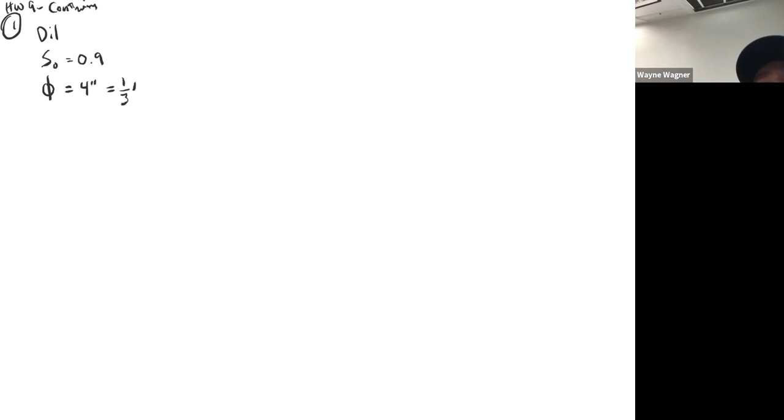And then it's got a mean velocity in that pipe. Velocity is usually written as U, and the overbar means mean. So the mean velocity is 8 feet per second. This U just means velocity in the X direction.

So that's what's given. And then required, we want to know what is the volumetric flow rate - that's Q - and we want that in CFS and GPM, gallons per minute. Then the mass flow rate, written as m dot, they want that in slugs per second. I'm going to assume that you, like everybody, aren't happy when slugs show up. That's pretty normal. However, just think of it as no different than kilograms - like if I had kilograms per second, we're just using a different system.

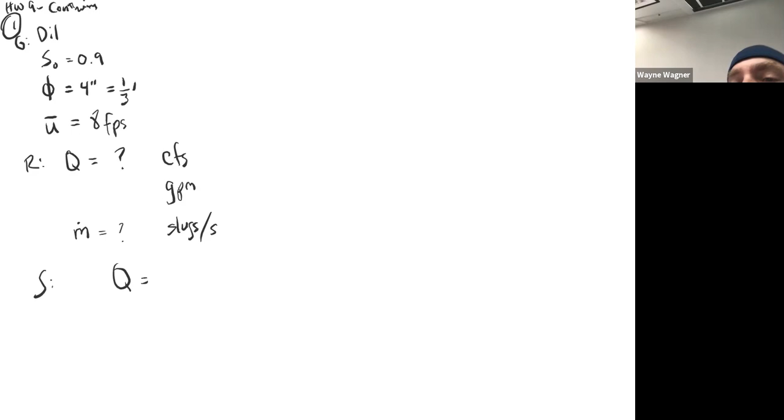So the way we do this is we have to think about Q. Q equals, technically, the integral of the velocity - which in this case will be U - times dA, integrated over the area. That's technically how we'd define it, really it's even a dot product. In this case, however, they don't tell us anything about this thing varying over an area - they just gave it to us as an average velocity.

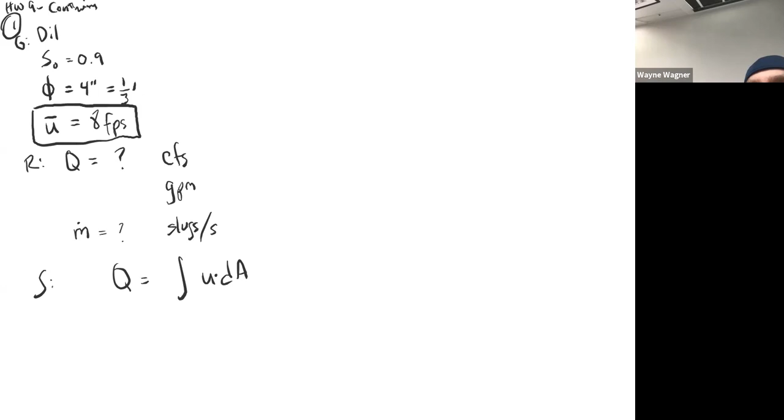So if you have an average velocity, you can change this and say, I don't want to deal with that integral - we're just going to make it the average velocity times the area, which is a lot nicer. If you get that, you should be very happy, and that's actually most of the time what we'll do here. On tests, sometimes I like to give you something with an integral just to make sure you know how to do it, but that's a once-in-a-while thing. Most of the time we deal with average velocities.

So once we get that, this is really not too involved. We've got a U right here, a U bar, that's 8 feet per second, and we've got an area. Now my area I went ahead and converted to feet because that's just the easiest thing to do.

So the formula for area that we use in this class almost always is pi times diameter squared over 4. You're used to pi r squared, but most of the problems here give you diameter, so it's easier to just get in the habit of using this.

So pi times the diameter, in this case a third of a foot, we'll put the foot in there, squared, and we'll divide by 4. That's how we get an answer, noting that we've got feet squared times feet, so we've got feet cubed over seconds.

So if we multiply that all out, I'll do the calculator here, although I don't think you need to see me punch this in, but we'll go ahead and do it. 8 times pi divided by 4, times 1 divided by 9. So that's 0.69813, and that's cubic feet per second.

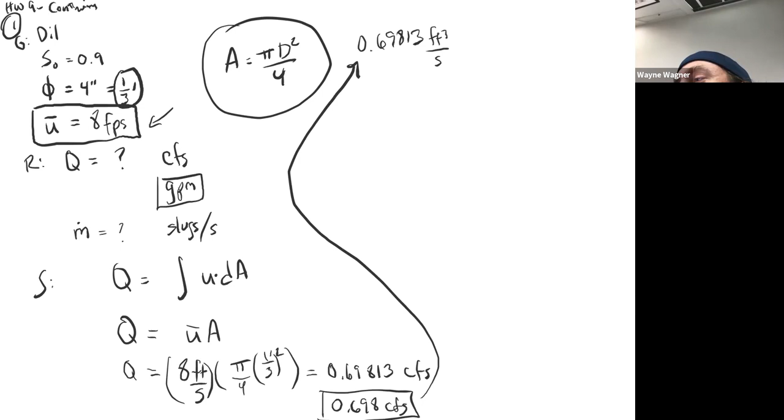Now if I were to do this to you on a test, you would just look up the conversion rate from cubic feet to gallons. You don't have any idea what it is? I have no idea, can you imagine? Can you guess? Like, think of a gallon of milk and then think of a cubic foot. How many gallons in a cubic foot, you think? I couldn't even guess, maybe 2. That's probably what I would have guessed too. It's actually surprising to me.

So 1 cubic foot actually has 7.48 gallons in it. To me, it's pretty surprising. So from that knowledge, you could actually pretty easily figure out how much, because you know the weight, it's 62.4 pounds per cubic foot. So you could very easily calculate how much a gallon of milk weighs, or a gallon of water, a gallon of anything that's mostly water.

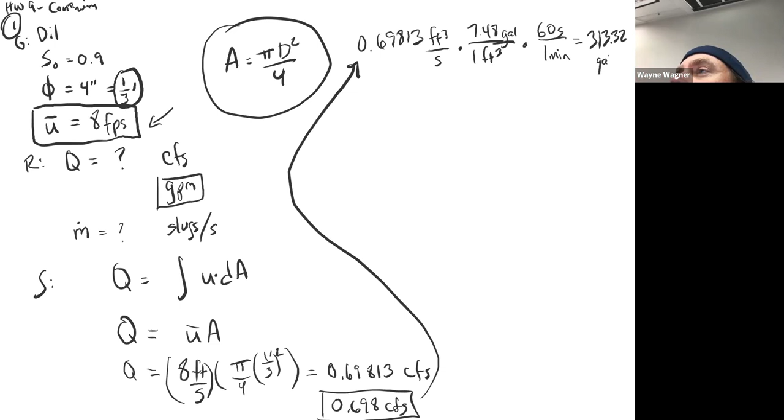So that will get a gallon, and then to get this into minutes we would do like this, so now we'll get gallons per minute. So we'll take that number, multiply times 60 times 7.48, and we get 313.32 gallons per minute, or 313 GPM.

And this is really a nasty unit, so we don't really ever want to do that if we can avoid it, so that's no good. Actually, let me bring up Zoom here. Maybe I can, oh yeah, I like having Zoom on 2 screens so I can see what it looks like. All right, so let's see.

All right, so the last thing is m dot. So anytime you want the mass flow rate, m dot equals rho times Q. And if you can't see that, just think about it as, all right, this is how many cubic feet... feet cubed. Where's my eraser?

Just to give you a little intuition here, this is how many feet cubed we're getting every second. And we're like, well okay, but I want to know how many slugs per second. Well then for every cubic foot coming in, how many slugs do we get? Right, so if I'm getting 20 slugs for every cubic foot coming in, and I've got 5 cubic feet per second, well I just multiply 20 times 5, and then I've got 100. Does that make sense? Yeah.

Okay, so this should be fairly logical, and of course stoichiometrically it works out because we get slugs per second. So then we need to do rho. So the rho for this oil, well that's SO times the rho of water, right? And then this is Q.

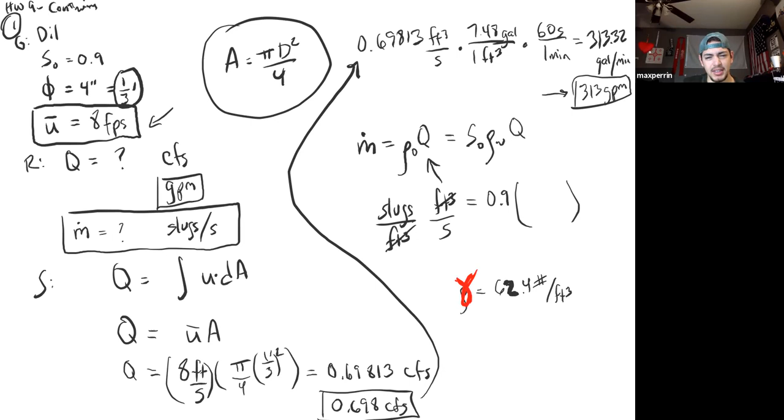Oh no, we want slugs, right? This is gamma. Okay, this is like the most missed thing on anything. So how do we go from gamma to rho? We multiply by specific gravity, or we multiply rho by specific... wait, okay, what's gamma equal? Rho over the rho of water. No, this is specific weight. Oh, so what is gamma? So gamma is rho times g.

So if I want rho, what do I do? Divide by gravity. So what's gravity in this system? 32.2. Okay, so this is what you need to do if you can't remember. So if you divide by 32.2, you're going to get...

Usually we just use 3 significant digits, but rho equals, if we divide by gravity... I like my equations to be equations. So there's rho. If we divide to 3 sig figs, it's 1.94. And this becomes, a pound divided by a foot per second squared, all of this, that's a slug per foot cubed.

So that's what we want to plug in here for the rho of water. This is for water, 1.94 slugs per cubic feet. It's always, especially in fluids or thermo, very good to keep track of your units. Okay, and then we multiply that by my Q, which was right here, this number.

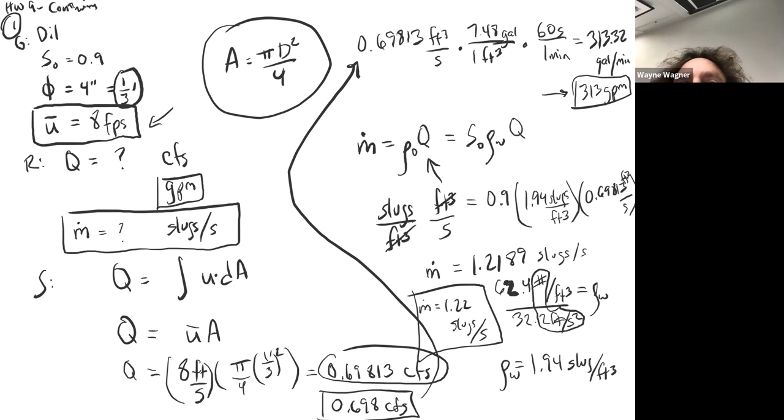Okay, what I like about this stuff is, well, we can think in terms of, let's see. So if you've got that thing open, I'm gonna go down to problem 6, since that'll have some integration involved in it. Okay, so this will be 6 on the same thing.

Now you have these solutions if you don't feel like writing any of this down, but it says water flows through a 50 centimeter tall, rectangular conduit, and it's just like a square conduit, 50 centimeters tall and 30 centimeters wide. It provides a velocity profile described as, this is like the water's going into or out of the board in this drawing, but this will be from the side view, and it's kind of flowing like this.

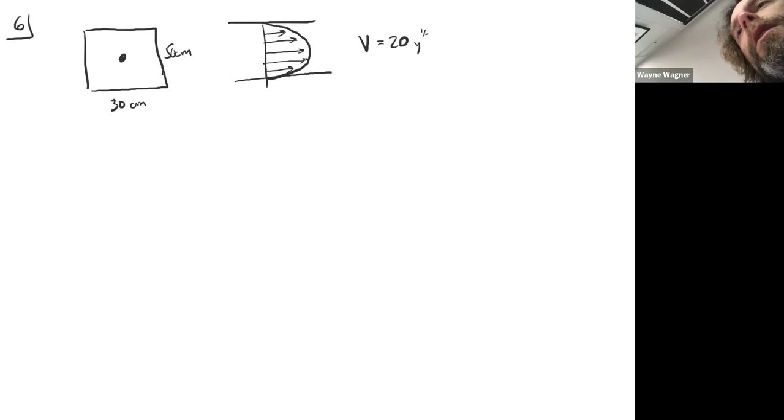And it says it has a velocity profile, which they call capital V, equals 20 y to the half. And they put meters per second out here, which is a little bit annoying, makes the units a little weird. That 20 has units on it, which I'd have to think about what those units are. What would those units be? Y is meters, so that 20 has units of meters to the half per second.

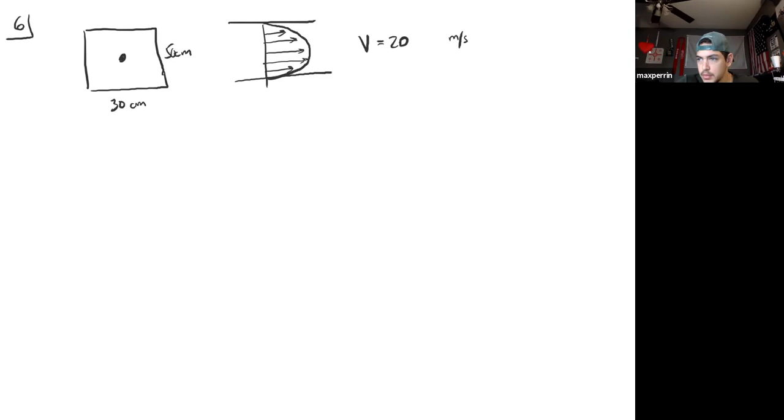It's pretty annoying. Anyway, I'm gonna go ahead and, because we're gonna get rid of that. This is meters to the 1/2 per second, times y to the 1/2. That's just because not having the units right is gonna aggravate me.

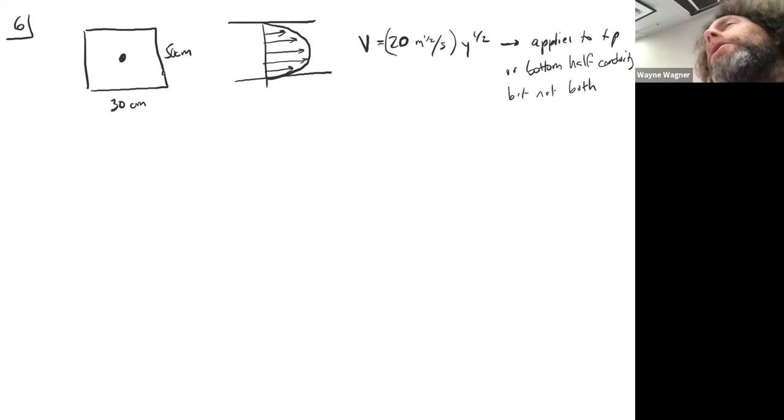And this applies to the top or the bottom, but not both of the conduit, half of the conduit, but not both. This is a terrible question, by the way, or a terrible way to write this, because it actually doesn't work. If you were to plot y to the 1/2, it actually looks like something like this.

So in many ways, this is kind of the opposite of what we need. I need to adjust this equation, but let's just roll with it for now. You know, and this would actually keep going like this. So I need to adjust this equation, but I haven't done that yet. So we're just going to roll with it. So pretend that this looks like this. Okay, it doesn't.

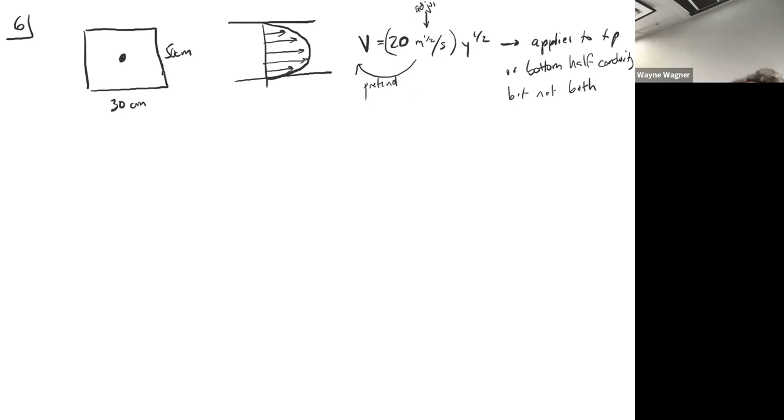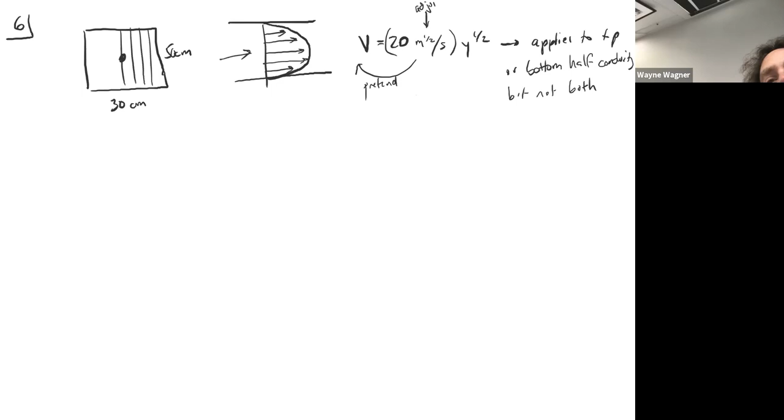Assume that the profile is the same over the entire 30 centimeter width. So basically this shape right here applies right here, it applies right here, it applies everywhere across this thing. In reality, there's friction near these walls, which is going to cause it to slow down near those walls. But whoever wrote this didn't want to deal with it.

Okay, so that's what's given. And then required is A, volumetric flow rate, Q equals what? And then B, the mass flow rate, M dot equals what? And then C is the mean velocity profile, so we're going to call that V bar.

Anyway, you can probably hear my dog licking at the screen door right now. I don't really know what his problem is.

All right, so we're going to solve this the same way we did the last one, except it's just going to be a little bit more complicated. So Q equals the integral of, in this case, V dot dA.

Okay, do you have any idea how to deal with this dot product or dA? Would it be a double integral? Yeah, it's a double integral.

Okay, so a lot of times we would say, well, Q equals, we'll integrate twice, V dot dx dy. Any idea which one of these we want to do first?

I have no idea. Maybe X? Or why, no, Y. Why? Because our velocity is given with a Y in it. Okay, I mean, yeah, you've got the exact right idea. The thing is, our velocity varies in the Y, it doesn't vary in the X. That's the key. So the X direction is really easy. The Y direction is not so easy.

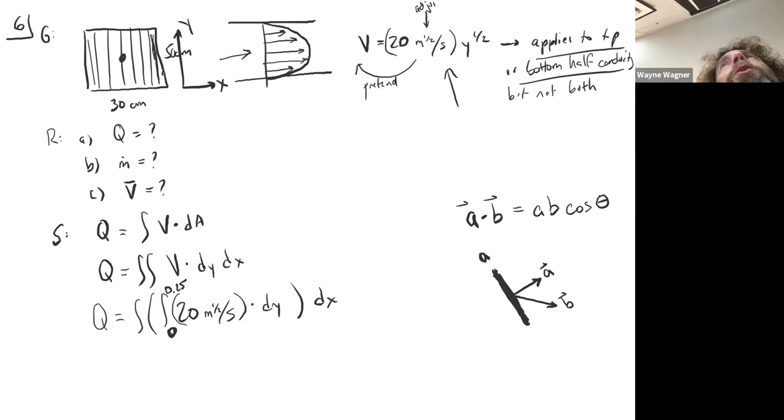Well, not all of that water or whatever it is actually going through the opening. Some of it is just kind of sliding along the opening, right? It's not actually crossing that boundary. So we only care about what's crossing the boundary. We only care about this right here.

That much is going to be the magnitude of B times the cosine of that angle. Okay, so that's where this annoying formula comes from.

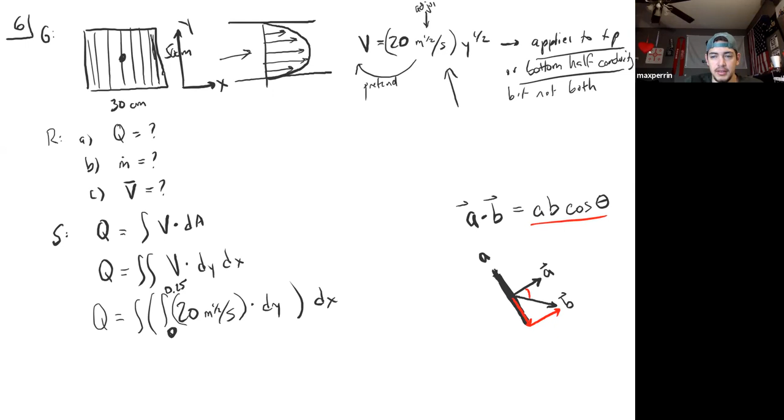Does that make sense? Yeah, that makes sense. Okay, so we have a dot product here. So basically what that dot tells me is, because I don't remember this formula, I don't care about this formula. What I think immediately is that dot product tells me that the only thing I care about is how much of this velocity here is actually crossing this area that we've got over here.

Okay, and so when I look at my picture, basically what I'm asking is: is all this flow perpendicular to this area? And if it is, then I can erase that dot and make it a multiply. If it's not perpendicular, then I can erase the dot and make it a multiply, but then I have to take into account the angle, so I have to put a cosine in there.

Does that make sense? My hope here is that you're getting a little bit more of a sense of where this annoying formula comes from, because I don't remember it. I just see the dot product and go, okay, I need to think about my angles here, right?

Because it could easily give me a different angle. Like if it gave me this angle here, then it's going to be a sine of that angle instead of cosine. But of course, this formula is okay because this theta is technically defined as between A and B, so the formula still holds.

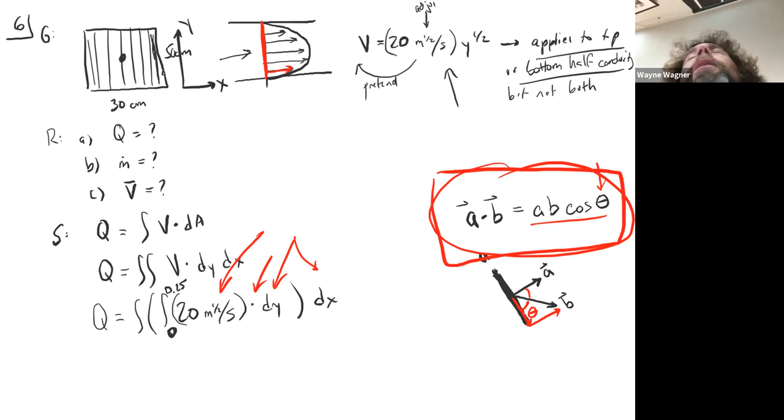But anyway, am I making any sense? Am I just jabbering on? Makes sense. Okay, so in this case, what we can do, because this is perpendicular to this area right here...

We can basically just erase this dot and treat it like it's being multiplied, which is good because we know how to do that, right? So let's go ahead and do that.

Oh, we forgot one thing. If I only go up to 25 centimeters, what else do I need to do? Because I haven't taken into account the top half. So how do I take into account the top half? You multiply it by 2, the whole integral.

Yep, so we're going to put a little 2 right there. Okay, so now we've got the top and the bottom.

Okay, so once we've done that, this should have 0.25 meters. So once we do that, we're just going to integrate. So 20 meters to the 1/2 per second. What happens when we integrate that?

It gets... what happened to the y to the 1/2 power at the top? Oh, thank you, thank you, that makes all the difference. Okay, y to the 1/2, right? Okay, so what happens to that y to the 1/2?

Oh my gosh, you add one to it, so it's gonna be y to the 3/2, and then divide the whole thing by 3/2, right? Or we're gonna have a 2/3. Okay, so we're gonna have a 2/3 out here, and then we've got a 2, and then we've got a dx out here, and we've got an integral here.

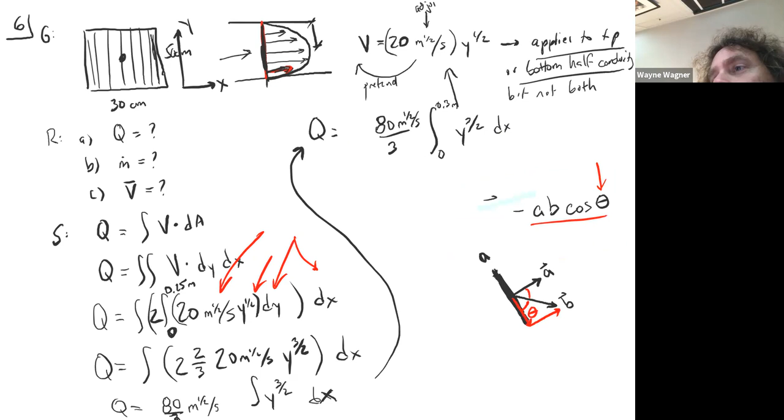Okay, so how does that vary with respect to x? So if we integrate that, what do we get? It's just a constant, so we just add on to it. Add an x. That's right.

So we get y to the 3/2 times x from 0 to 0.3 meters. And then we've got this 80 meters to the 1/2 per second over 3. And so now we just multiply the whole thing by 0.3 meters, right?

So we'll end up with 80 times 0.3. So that's 24. So 24 over 3, which becomes 8. Perfect, nice clean number. So we get 8 meters to the 3/2 per second.

Wait, do we ever plug in our y? We didn't plug in our y's, did we? Dag nubbit. All right, let's step back a bit. I was like, this is kind of weird.

Let's go from 0.25 meters to 0 right here. And I'll go ahead and plug that in with my calculator here. 0.25 to the 3/2... I'll do 3/2, 1.5, times 80 over 3 divided by 3.

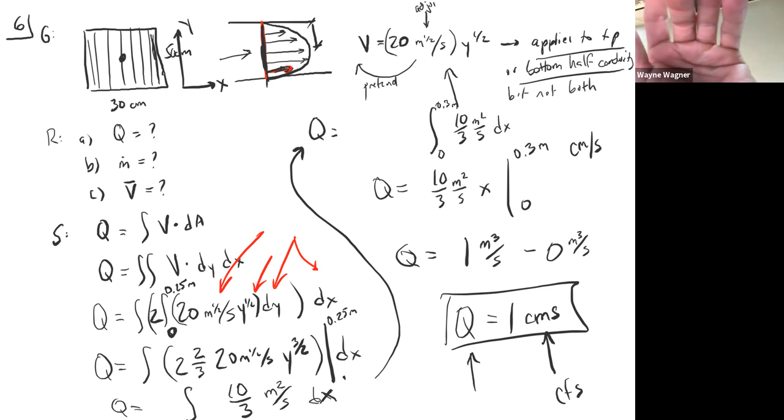The more common unit, especially in this country, is CFS. So if you were to look up the flow rate of the Mississippi River on the USGS website, they'll report it to you in CFS. Right now we're probably at 500,000 CFS. It almost seems like we should have a different unit, because once you get into the 500,000s... The Mississippi River varies from about, I don't know, maybe 300,000 on the low end, and on the high end it goes over 1 million. And maybe in a severe flood, 2 or 3 million, where we're terrified that cities are gonna... I'm not exactly sure what those numbers are, but it's something like that.

Any questions? No? Okay, I mean, I don't know if you're at all interested in rivers. If not, I won't mention too many more rivers.

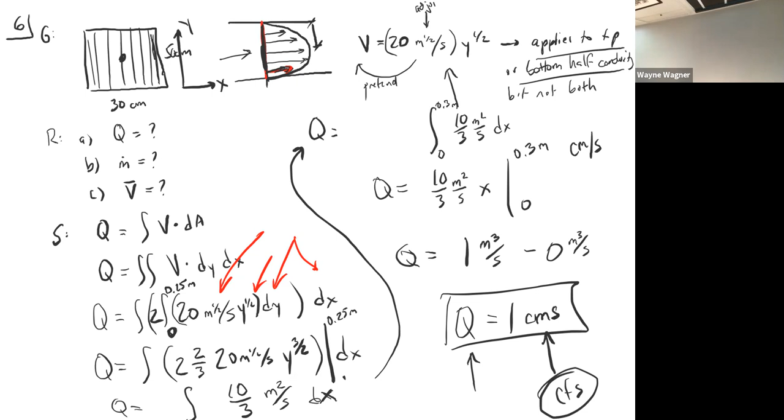To me, it's the thing that keeps me in engineering, is that I love rivers. So I'm more of a scientist than an engineer in some ways, because I've never engineered a river, but I've studied quite a few. Everybody has their angle, right? Some people are like, I don't care about any of this, I really like soil. And some people really like water treatment, or structures, or whatever. So you're civil? Mm-hmm, okay.

Do you have any idea what direction you want to go with it? I'm not sure yet. I'm taking geotechnical engineering, so I'm just getting into the soils part of it and structures at the same time, so it's like 3 different areas. You actually get it. The thing that kind of stinks is that you don't get into the interesting things until you're so far into it that if you don't like them, you're like, well, what do I do now?

Hopefully you're liking them. Oh yeah, for sure. They didn't teach me enough about rivers when I did this. They taught me all about water treatment, which I actually find very fascinating, but I didn't like the idea of going to work at a water treatment plant. And I really found structures very interesting, but then I thought about it and I was like, I don't really want to be a structural engineer, even though I love it, it's just not really the thing for me. It wasn't until I got to grad school and they were working on rivers and natural systems that I was like, no, this is it for me, this is what I love. So we each find our own little niche, right? Yep, and I can't make everybody love what I love, thankfully.

All right, I've got a few more. I think maybe before we do an engineered solution, since we just talked about a river, let's do a river one, because this is one I came up with that I really love. Actually, let's not do that one, let's start with an easier one. Let's start with number 7, and then we'll go to the one that I love. Okay, here we go, number 7 on that same problem set.

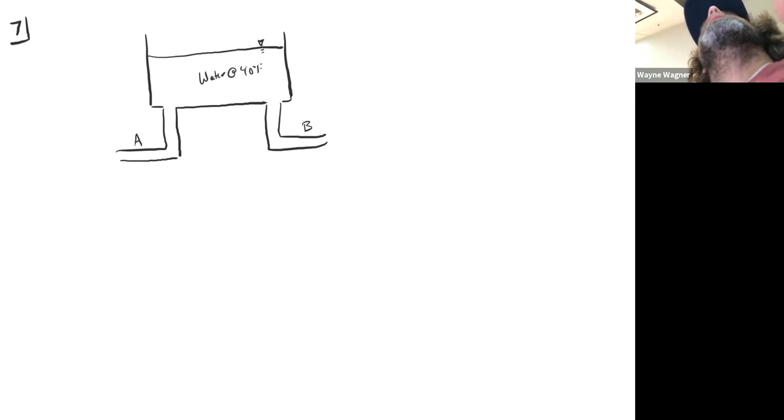The typo is it says water at 10C. This actually should be 10F, or really it should be 40F. So we'll call this water at 40F. Okay, it doesn't really matter—I mean, it does because it changes the density of the water, but we don't need that here.

Anyway, water enters from the bottom of the tank at pipe A at 9 feet per second. And the level of the tank is falling at a rate of 1/2 inch per minute. So this thing right here is falling at 1/2 inch per minute.

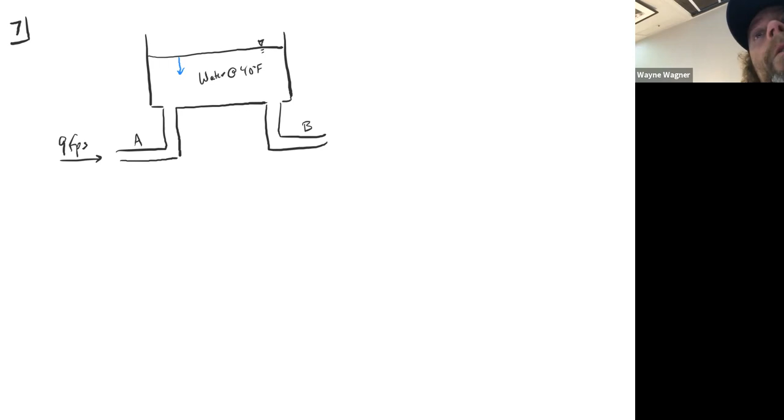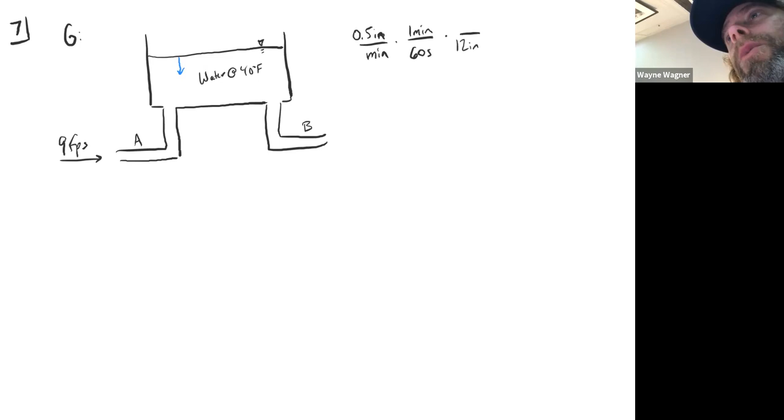I don't want to deal with inches per minute, so I'm going to adjust that now. I'll consider that one of my givens: 0.5 inches per minute—that's a horrible unit. So I'm going to multiply that by 1 minute over 60 seconds, 1 foot over 12 inches. So basically it's not falling very fast.

I have to do a half divided by 720, so 0.5 divided by 720—yes, a very small number, 6.9444 times 10 to the negative 4 feet per second. And of course, that's why we use these horrible units, because it's something we can picture, whereas if you just told me the other number, I'd have no idea what that means. So that number goes right here.

So let's just call that—what do you want to call that?

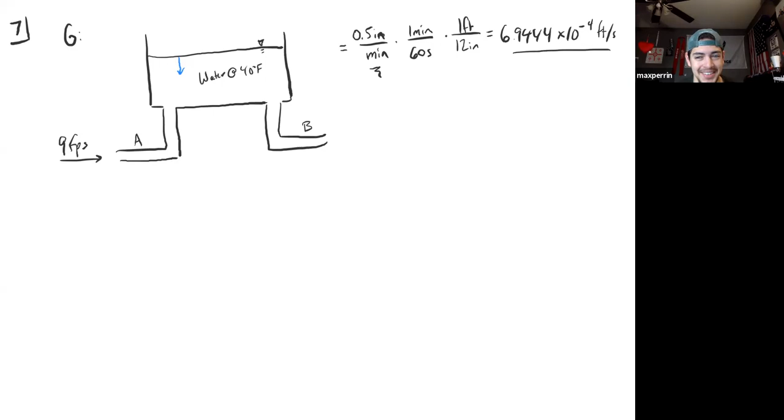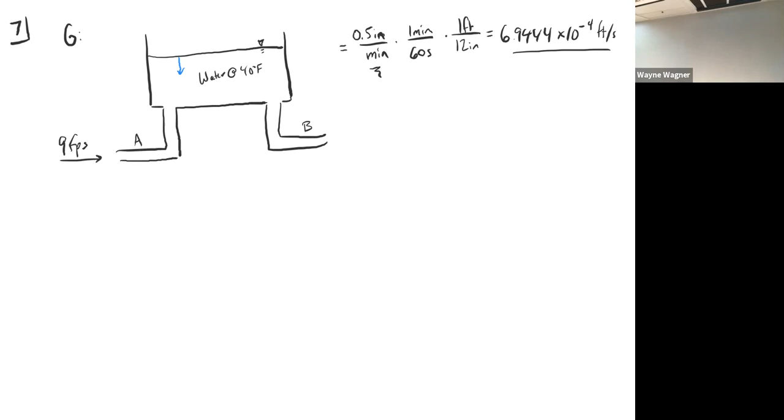I have no idea. Well, let's leave it like that. When we get to the equation, I think you're going to see where it goes, and there is a good thing to call it. I want you to think in terms of calculus. I'll leave it at that for now.

Assuming that the tank has a cross section that is 8 feet by 12 feet. So the top of this tank, if I were to draw it in 3D, this is going to be 8 feet, and this is going to be 12 feet.

What is the velocity in pipe B? So required is VB equals what? Did it say anything about...

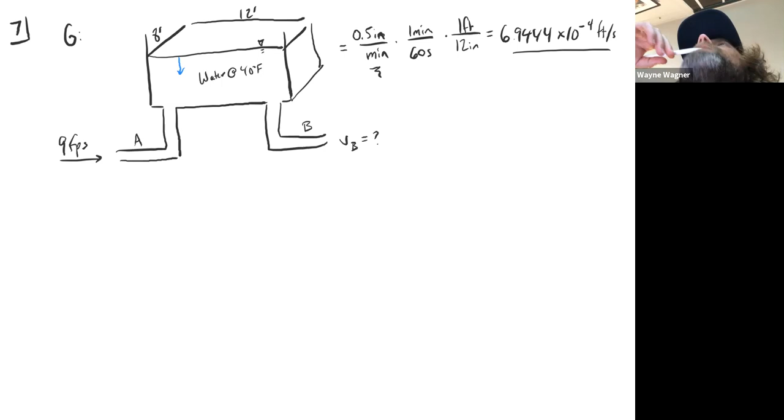That's interesting. Oh, okay, it does give us the diameters. I was like, we must have the diameters here. So diameter A is 8 inches, so that's 2/3 of a foot. Again, I'm not working in inches. I guess I could have in this problem because everything is given in inches, but I chose not to. So this is 5/6 of a foot.

So required is VB equals what? One thing I will note about VB is we don't know if VB is going in or out. What does your gut tell you about VB? Is it going... what's that? It should be going out.

How do you know? Because the water's sinking. Right, water level sinking. So essentially it has to account for it. Both of these things tell you that should be going out, right? We've got water coming in and the level is dropping, so both of those should be encouraging water to leave at VB, right?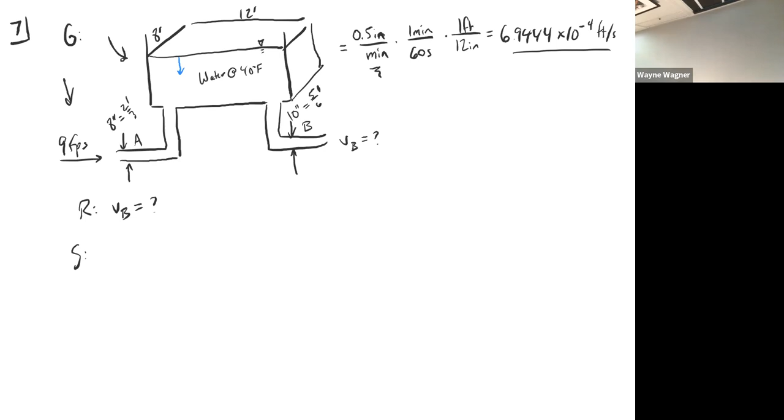So did you watch my video on conservation of mass? I don't think I got to it yet. Okay, so here's how we're going to do this. This is how I like to do these things. I think about conservation of mass. I had a professor that always taught this way, as what goes in...

What is what goes in equal to, do you think? Would it be the 9 feet per second? Right, so that's going to be when I work downwards. But what other concepts should it work into? So like the mass that goes in equals, if I wanted to figure that out, how would I figure it out?

Would it be like how we do weight equals specific weight times volume, but not? You're thinking in the right idea, but let me just explain conservation of mass. In a nutshell, this is: what goes in equals what goes out, unless what? Like in this case, what goes in and what goes out are not the same. I think we can agree on that, right? How do you know that they're not the same?

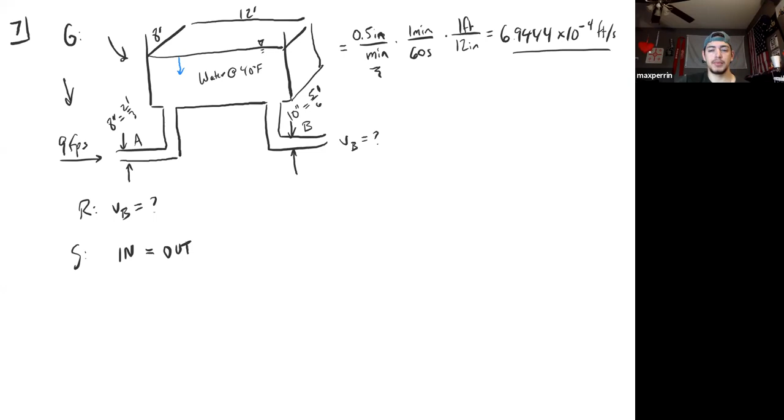Because the pipe diameters are different. Maybe? Yeah, but the velocities could overcome that. Like I could easily have a pipe that went like this, right? And then what flowed in right here would equal what flowed out there, right? So this flow would equal that.

But in this case, there's something else. Like you knew this was out. How did you know? Because the water level was going down. Right, so what was stored in the system was changing. That's how we know that what comes out is not equal to what comes in. In fact, what's leaving is more than what comes in.

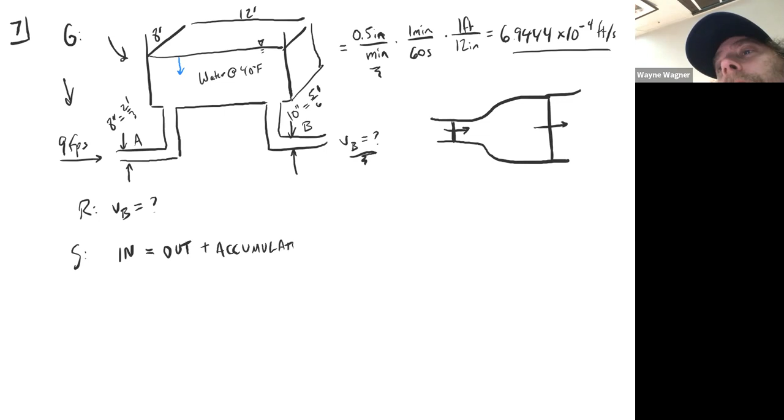Do you know? It's okay, so this is what it is. This is how I do it. In equals out plus accumulation, and I'll go ahead and write the full word here: accumulation. The accumulation in this case is negative, right? We have negative accumulation. We're losing mass, right?

So what I'm going to do here, I'm going to draw a control volume. This is my volume, right? Let's not use blue, let's use red. Okay, so we're going to think about this, and this thing is going to be right at the surface of the water. What I want to do is think about things that are crossing that boundary.

So this 9 feet per second is crossing that boundary and it's going in. So we need the mass flow going in, so that means rho Q in. Fair, right? And in this case, we're going to call that A. But right now I'm just expanding this. Equals out—well, we've got rho Q out.

Okay, and then the accumulation term. So this is how much is coming in per second. Actually, let's develop this a little bit. If that's how much is coming in per second, I want to know the total that's coming in. Well, I need to multiply that by time, so change in time. Rho Q in, that's like slugs per second in this case. If I multiply that by a certain number of seconds, that'll tell me the total amount of mass that flowed into the box.

So we can do out, and I can say, well, rho Q out. I'm going to put the parentheses here for the in, and out, for the same amount of time. Plus, and right here, I'm going to say the change in mass equals the total change in mass. What this says is, if I've got a certain amount of slugs per second flowing in for however many seconds, that tells me how much went in. This tells me how much left. And the difference between those is how much mass changed within my container.

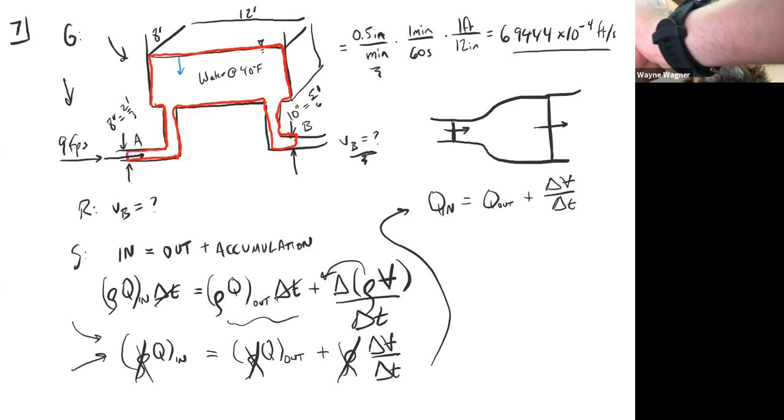And there's another way we could do this, I've done this before, so there's two ways you can solve this. One, I could take my control volume and do a different control volume. Let's suppose I put my barrier here. Then instead of thinking about this dropping as a change in the accumulation in the system, I could just think of it as a flow rate going into my boundary, crossing my boundary. So that's another way we can do that, and we'll do it that way too, and you'll see it get the same answer. But right now I'm thinking about this as change of volume per time.

And I guess what I was driving at is this is a derivative. If you do this on a small enough scale, you can make it like that. Now it doesn't matter in this case because the flow rate is constant, but on other problems it might matter. How do we define this volume? If you want to define the volume of this thing at a moment, at an instant, how would you define it? Oh, of the tank.

We aren't given the height of it, so that matters, right? Well, let's not worry about this particular problem. Let's just say you had a problem and the tank is a cube or a rectangular solid. How would you define the volume of a rectangular solid? Area times height, or length times width times height, whatever.

So let's do area times height. I like it like that in this case. Is the area changing in this problem through time? Does it because of the pipes, or no? I mean, obviously when this thing drops low enough, it will. But when the water is still in the tank itself, it's always 8 foot by 12, right? Okay, yeah, so we can take that area and bring it outside.

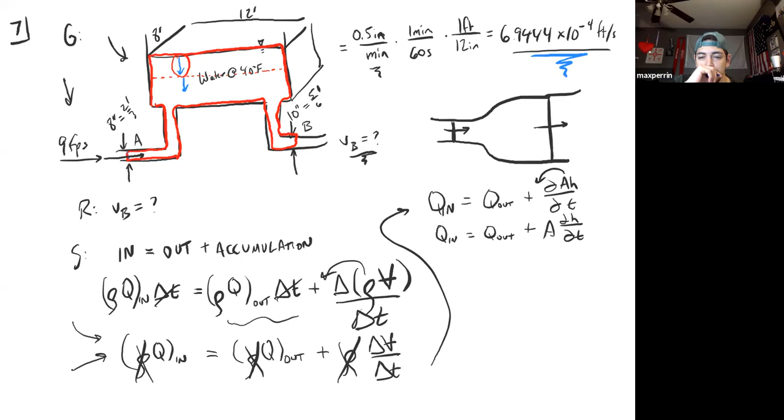So we got Q in equals Q out plus area dH dt. All right, now, what do you think we want to call this rate right here? Velocity, because we have height over time, so meters per second. Yeah, or feet per second in this case. So what we're going to call it is dH dt.

Does that make sense? So it's how much the rate of the water is changing per time. Okay, and we're going to do something else here. We're going to put a negative sign on it, because it's going downwards.

Okay, so now we're ready for this problem. I mean, I just derived a whole bunch of stuff in the equations, but when I can actually talk to somebody, it's a little bit more useful, I think. So what we're going to do here is Q in, 9 feet per second. So Q in is that times the area, right? So we don't need to worry about that dot because it's just going to be straight across it.

So we got that, and now we need the area of that pipe, which is pi times the diameter squared, so pi over 4 times the diameter squared. So it's 2/3 squared, equals Q out, which we assume is out. So if it ends up getting us a negative number, that means it's in. Okay, so it's just like statics where you assume a direction.

We're going to assume a direction here, so I would call this VB. And the area of that pipe is pi over 4 times 5/6 of a foot squared, like that. And then we're going to add the area, which is 8 feet times 12 feet. What is that? 96 square feet.

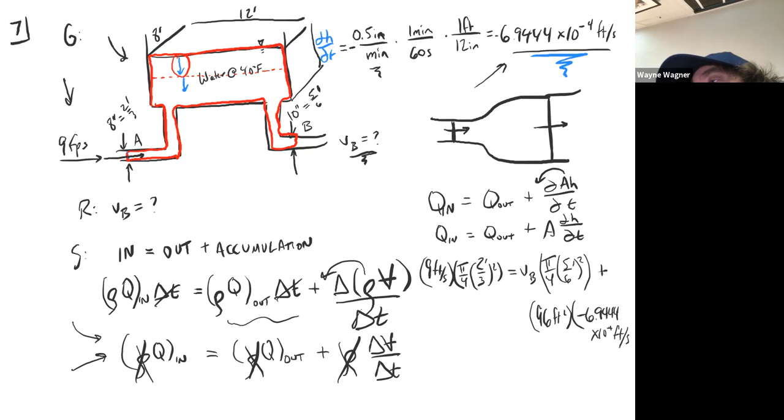Times this number right here is my dH dt, negative 6.9444 times 10 to the negative fourth feet per second. Okay, and I'm assuming you don't need to see me plug this all into the calculator.

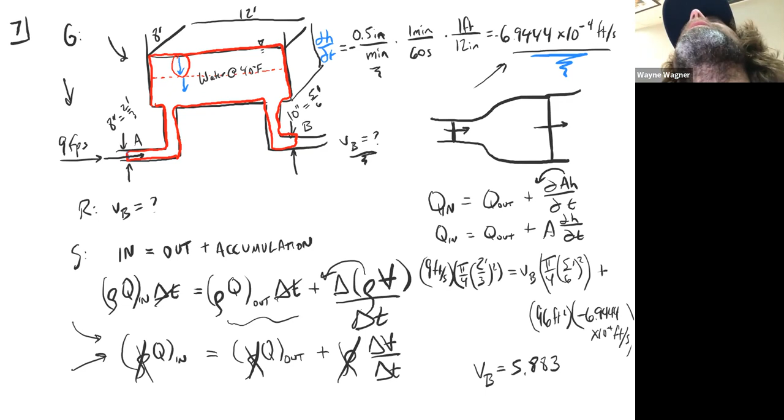No, but if you do, let's see what the answer is. I've got that open on another tab somewhere. Let's scroll down. It comes to 5.883 something. Looks like back in those days I didn't keep 5. So we'll say VB equals 5.88 feet per second.

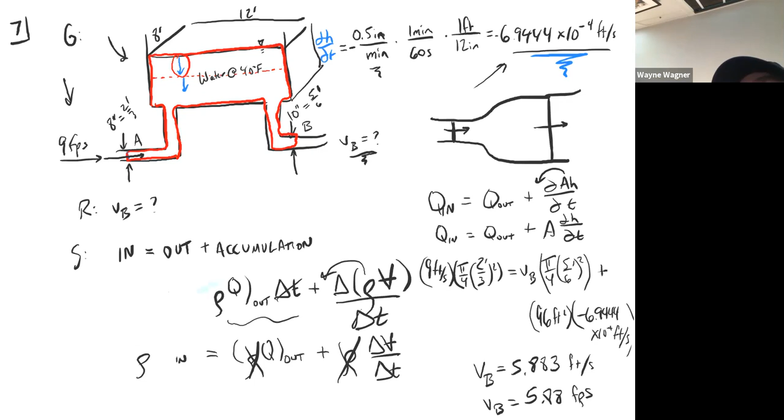So the other way we could have solved this, with in equals out plus accumulation, is something you'll notice: the rhos don't matter as long as it's incompressible. So as soon as we notice it's water, you can immediately think, okay, this is incompressible, which means the rho is going to be constant everywhere, which means I could treat this like, well, rho in, all the rho ins equals all the rho outs, plus accumulation. And then what I could have said is, I want a different control volume.

So I'm going to use this control volume, like that. Hey, okay. And then once I do, hey, shh, it's okay. It's just a dog.

All right, so then we've got this one going in. Q in, I've got Q out, we're assuming. And the way I've drawn it, this is not accumulating anything at this point. So what I'm going to do is treat this like a Q in. Okay, so this accumulation goes away. I've just got two Q ins.

And so in this case, I've got 9, I mean it's mathematically going to end up being exactly the same, 9 feet per second, times the area, which is going to be pi over 4, times the area of that pipe, which was 2/3 foot squared, like that. Okay, that's an in. And then we've got, this one is a flow rate in, so it's going to be that velocity, which I'm now going to treat as positive.

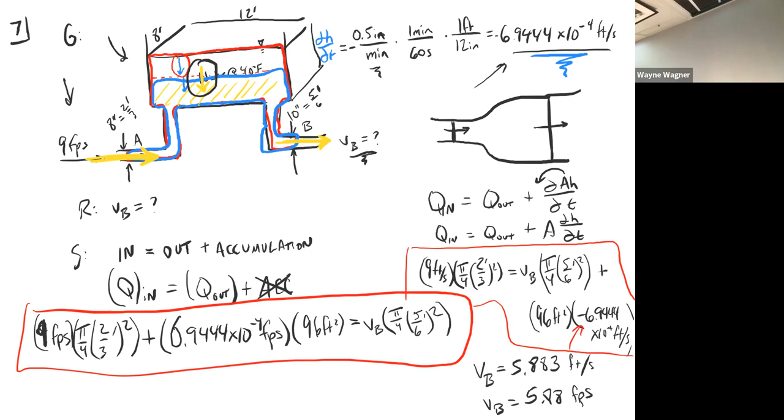No questions? Okay, we've got 15 minutes, so we may not get to my favorite one, but that's okay. Let's go, because I wanted to do one where the density changes. Let's do number 8, because this is pretty interesting.

Air at standard conditions, 1 atm. This is number 8 on that same problem set. Given air at standard conditions, let's draw the picture. Here's some kind of tank. This is exactly like the last problem, except there's one interesting thing going on here: this is a compressor.

As soon as you see compressor and you see air, you need to note that the density can change. And probably that's the point of the problem.

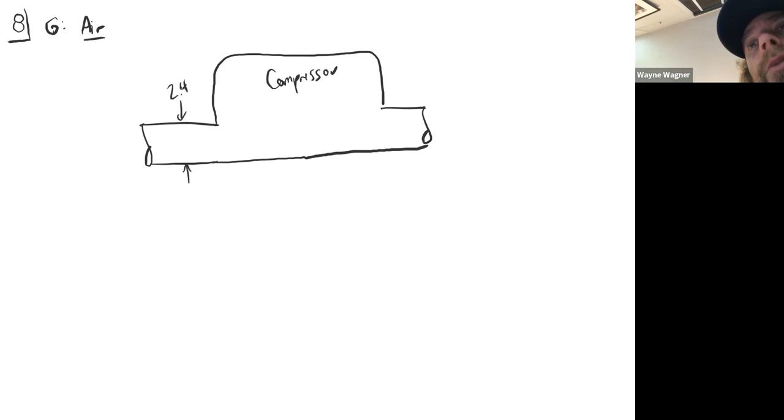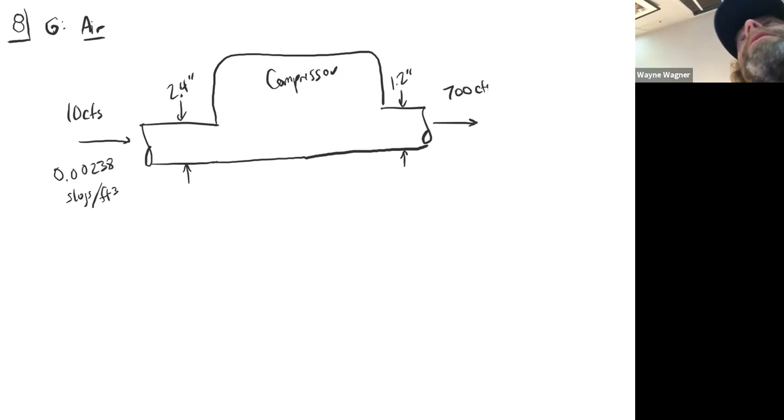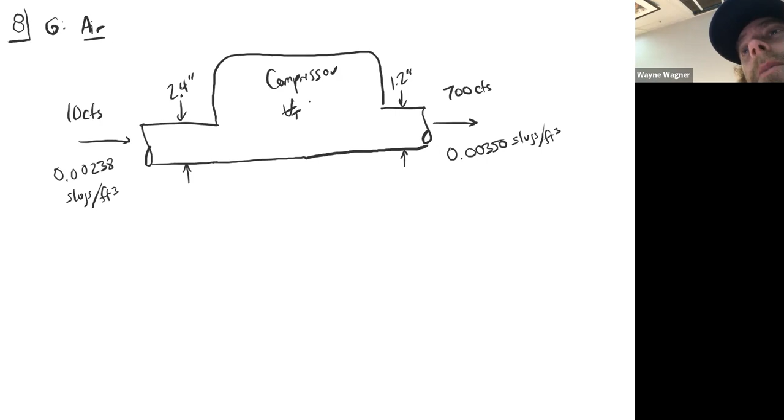This is 2.4 inches, and this is 1.2 inches. We hate inches, especially because they tell us this is coming in at 10 CFS, with a density of 0.00238 slugs per cubic foot. We hate slugs too, but there's nothing we can do about it. This one is 700 CFS, with a density of 0.00350 slugs per cubic foot. And the volume of the tank, VT, is 50 cubic feet.

Let's see. And what they want to know - this is given, they're required - they say they want the average time rate of change of air density within the tank. So something equals question mark. Any idea what symbol that would be?

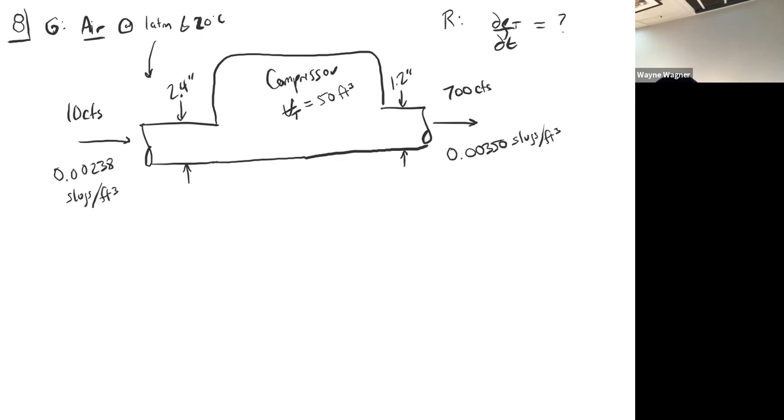I have no idea. Okay, if I want the time rate of change of something, what does that look like in calculus? Time rate - DT. So we're gonna have a DT on the bottom, and we want the average time rate of change of air density. So D rho - and I'll put a little T on there, just to remind me that's the rho in the tank. I mean, we never ask you guys to use calculus, but it helps to start thinking along these lines.

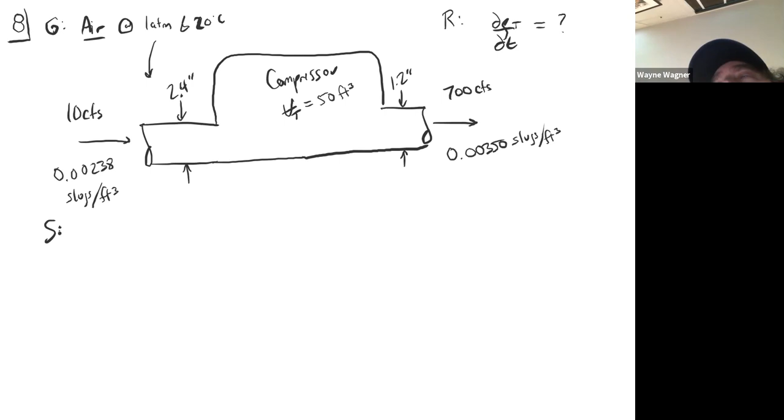So here we go, we've got a solution. What do you think we're going to do here? What kind of equation do you think we're going to work with? In equals out plus accumulation. Yes. Where do you think the d rho t dt is going to come in? I feel like that's going to be in the accumulation. Yes, I think that's a really good thought process.

All right, so we've got an in, right? This is our in. This is our out. We've only got one in, we've only got one out. So let's go ahead and start doing it. Rho Q in equals rho Q out plus the accumulation, which is d by dt of mass, which is rho v.

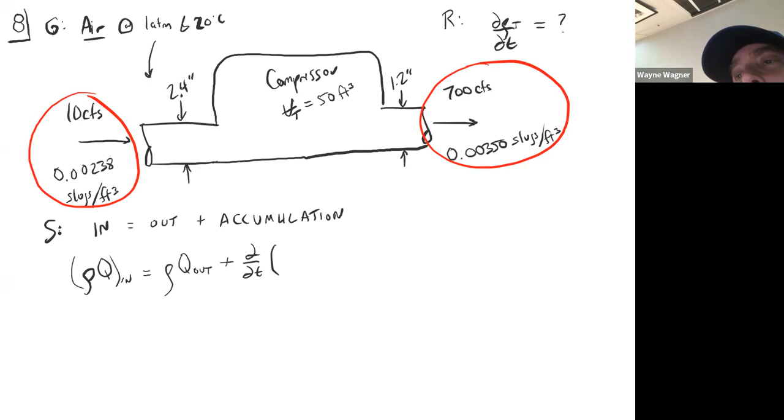This one's not so nice as the last one because we're not able to just get rid of rho, since the density changes. Notice we've got a density here and a different density here - it's compressing it, raising it from 0.00238 to 0.00350. Now luckily that's not really a big deal because we just plug those numbers in here. Now this d rho t dt, that's going to come right here - we can see the d rho t and the dt right here. And we notice that the volume of the tank, however, is not changing.

Okay, so that's where this all comes in. Okay, so you ready? Tell me what to write.

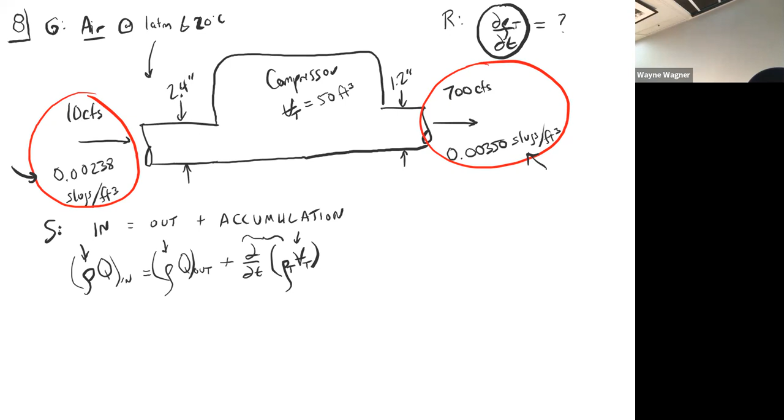Okay, so we could, or no, we can't. So we'd plug in the rows, right? Yeah, in our Q's. Do we know Q's? Yeah, that's the 10 cubic feet per second and then the 700 cubic feet per second. I actually screwed up, let's forget that that's CFS. This is actually FPS, sorry. So we can't plug that in, but we can get a Q from that, right?

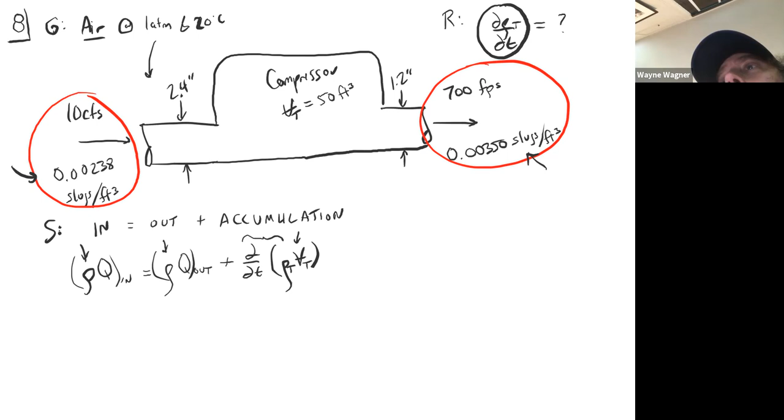Yeah, let's go ahead and get that Q. How do we get this Q over here? Cubic feet per second, we've done it several times now, but it is still new to you. Do you remember what Q equals? Look at your notes. Oh, let's see.

Okay, so integral of V dot dA. Yeah, okay. Do you think we need to worry about this dot product in this case? I want to say no. No, because it's flowing out perpendicular to that area, so we don't have to worry about that.

What about the integral? I don't think so. Okay, the only way we would ever deal with the integral is if they give us a velocity profile. If they don't give us a velocity profile, we can't really deal with it. So what we're going to do is we're going to treat this like it's an average velocity. So we're going to say Q equals the average velocity times the area, like that.

Okay, so basically we're going to say Q equals 700 feet per second times that area. How do we get the area? Pi r squared over 4. Or was it d squared? D squared, right. So pi d squared, which is going to be 1.2 inches, which is totally annoying.

1.2 inches is 0.1 feet. Actually, that's not so bad, is it? 0.1 feet squared divided by 4. Okay, so Q equals 700 times pi divided by 4 times 0.1 squared equals 5.49, 5.4978 CFS. Okay.

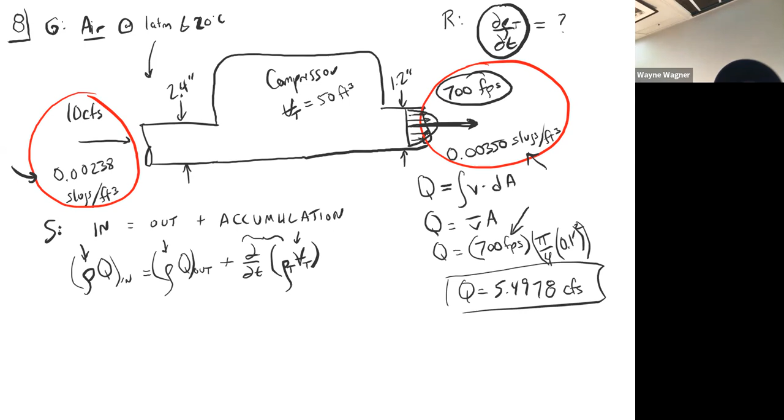So note here, we could have done it all in inches. I would have just had to convert this to inches, right? And I didn't really feel like doing it because then this 10 CFS would have also had to be converted to inches, and this cubic feet right here would have also been converted to inches. So it's kind of like, whatever you want to do.

So notice that what's flowing out is flowing out, Q here is less than Q here. Okay, but the density is higher. So it's hard to tell whether the density in the tank is going to be getting higher or lower because we can't really tell the mass flow rate. But it looks like, if we compare CFS, this one is basically double of this one, but the density is not double. So it seems like what's in the compressor then is probably increasing in density over time. Just guessing. But anyway, so let's go ahead and do it.

Tell me what to write down. Like the values? Yeah, all right. So plug it in, we would start with 0.00238 slugs per foot cubed. Right, and then we would plug in that first Q of 10 cubic feet per second. Yes, which equals the 5.4978.

Yes, or we could do the density first too. Oh yeah, well, yeah, that's fine, you're gonna switch order I guess. And the density is 0.00350 slugs per foot cubed. Slugs per foot cubed, okay, equals. Should we, or is that plus? Oh yeah, plus, sorry, yeah.

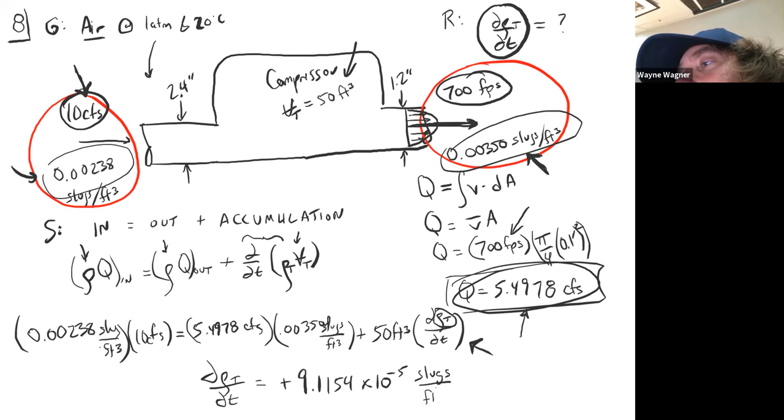I'd say small, I don't think it would change much, especially because we're talking about per second. Let me get all the units and numbers here: 9.1154 times 10 to the negative 5. The units here are basically density per time, so it's slugs per foot cubed per second. So yeah, small number.

So is that logical? Does it make sense? Yeah, so that means the density is increasing over time? Yeah, by some very small amount, because more mass is coming in than is flowing out.

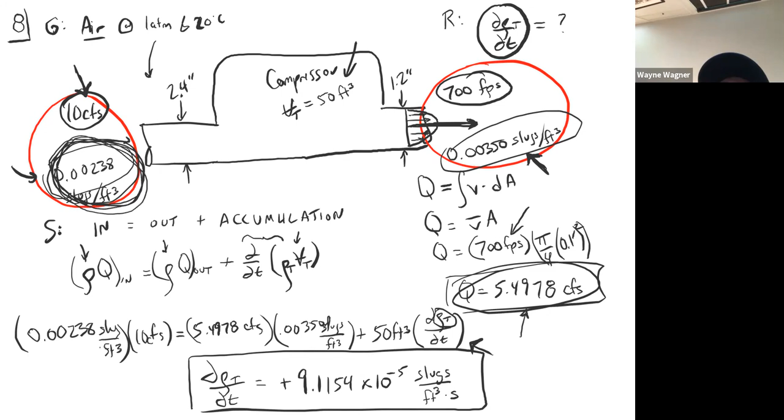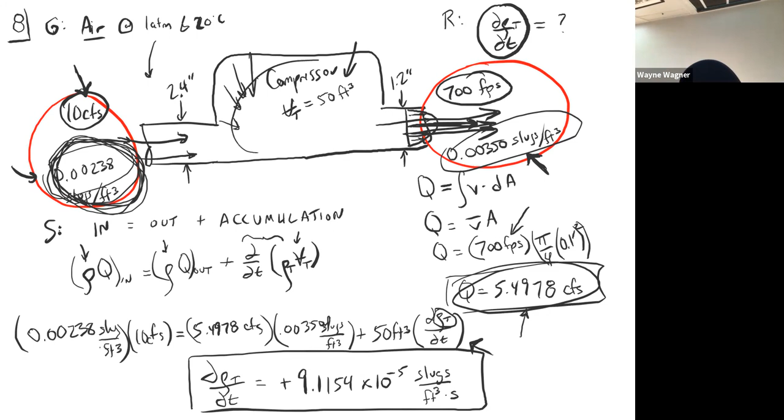Ultimately, what will happen in a real problem, like a real compressor, I have to imagine that maybe you can force this amount of density in, but maybe not. What's going to happen eventually is as this gets more and more dense in here, it's going to start driving denser fluid out, or make it harder to push more fluid in, because as this gets more dense, it's going to push back harder. But that's a different question entirely. So right now, this is just the quote unquote easy problem.

All right, we've got like 2 minutes. Can I line up my favorite question, just because I created it, and then we'll call it a day? Okay, it's my favorite because I created it.

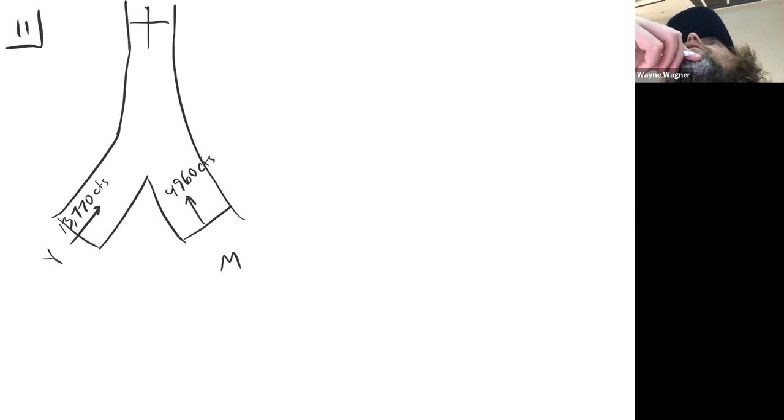The Yellowstone has a flow rate of 13,770 CFS, and the Missouri is flowing at 4,960 CFS. Exactly one mile downstream, somehow she measured at the exact same time, and she got a flow rate here of 17,840 CFS.

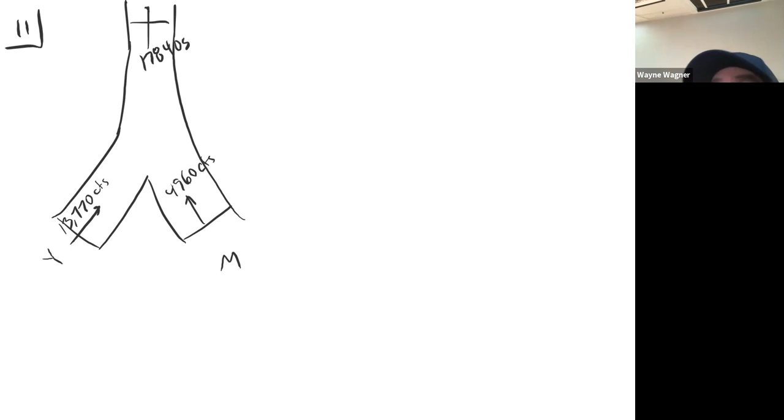This is a one mile stretch. I'm going to change my drawing a little bit. So this is right at the confluence, where they meet, but these rivers keep going this way. Is the river rising or falling, and how fast? We're going to assume the river has a width, this whole thing, even though I drew it kind of shrinking, of 300 feet. So is the river rising or falling?

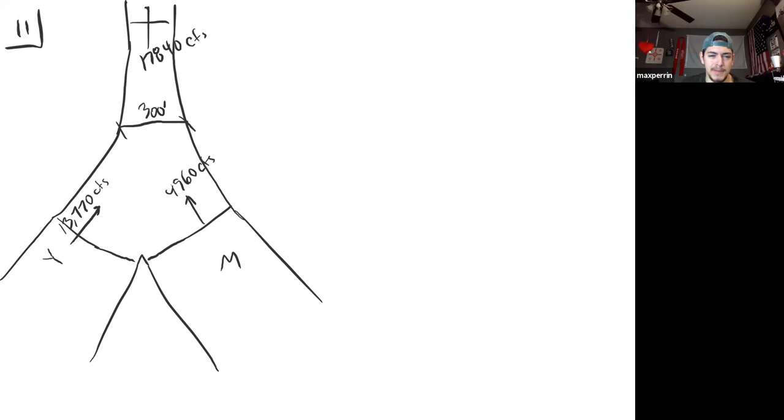Probably need a calculator to figure that out. What do you think? Rising. How can you tell? It seems like the flow is increasing. Yeah, because there's more water coming in than is leaving.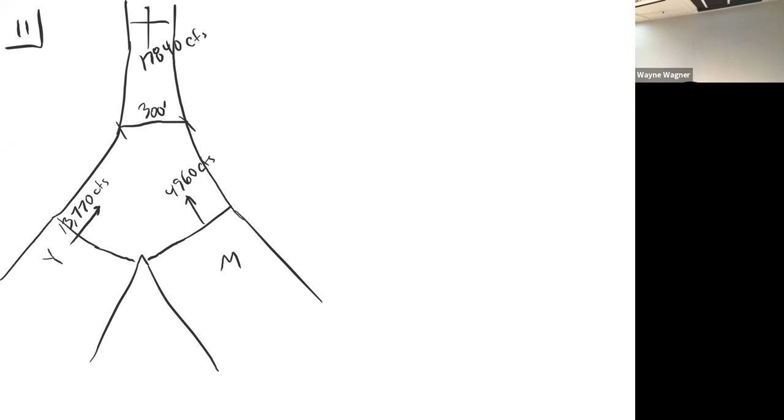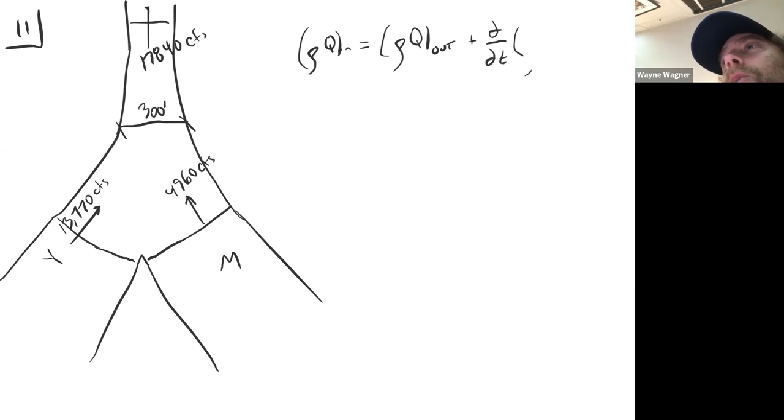And if you wanted to know how fast, I'll do it real quick. So what we're going to do is rho Q in equals rho Q out plus the accumulation, D by dt of rho V. So that's the mass, right? And we note that it's all water, so these rho's go away.

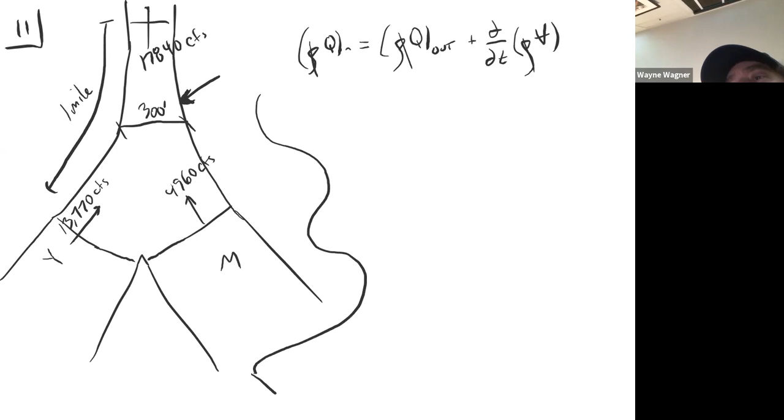Then I basically gave you the volume by saying this is 300 feet wide by a mile this way, so we're going to pretend it's a rectangle. Really it's a swervy river, so it's kind of curved, but if you can call that a rectangle, it's a pretty good guess. If this is 300 feet wide by 1 mile long, it's pretty safe to say it's pretty close to a rectangle.

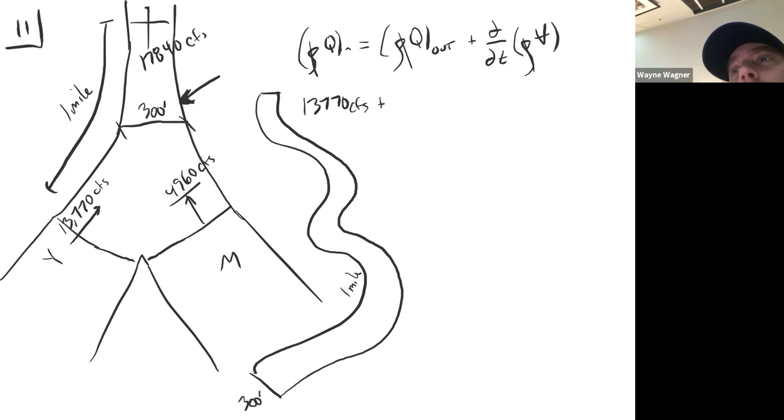So then we'll say: Q in is 13,770 CFS plus 4,960 CFS equals what's leaving, 17,840 CFS, plus, for that volume, we'll take the area since it's not changing in time and pull it out. That's 300 feet times a mile, the area of the top of this thing, so 300 feet times 5,280 feet, that's the mile. Then we're left with dH dt, and we can solve for dH dt.

Okay, I don't remember what the answer is, but that's how we would solve this. Can you see there's quite a few assumptions that were made here that make this kind of wrong? Can you think what a few of those might be?

Aside from the fact that we're assuming the shape is a rectangle, which clearly it is not. Anything else?

You have to think about how rivers work. I don't know how much you know about how rivers work. Not much.

Okay, well there's a few things. So the shape, the vertical shape, is a rectangle. But the other thing we're assuming is that if we were to look at the cross-sectional area, it could have a shape like this. Oh okay, so then the hill slope kind of goes up like this, right?

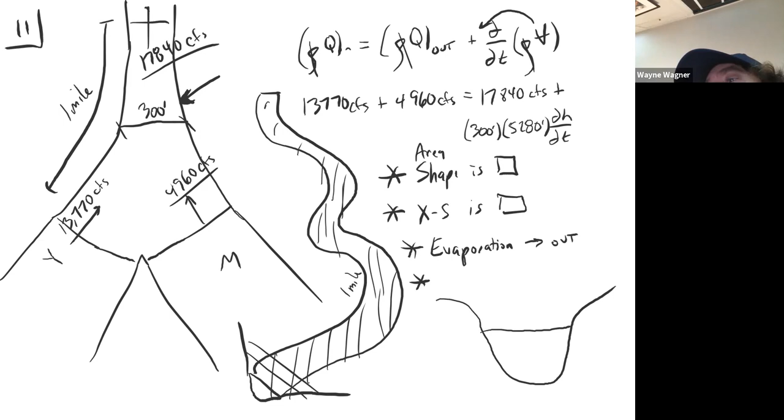So like, if here's a river, flowing into or out of the board, let's suppose this is all sand. Then what happens is the water table is kind of like this inside the ground. Let's suppose it's at complete equilibrium, so there's no changing, right? So if it looks like this, can you picture what I just drew for a river? Oh yeah.

Okay, so then what happens is, let's suppose the river level drops all of a sudden, it drops down to here. Okay, so now what happens is all this water is going to start to come out and it's going to flow into that river.

And really what's going to happen is the pressure here is higher than the pressure here, so the water is actually going to flow out. You're not going to see it - I guess there are times and places where you would see it, but really it's going to flow like that.

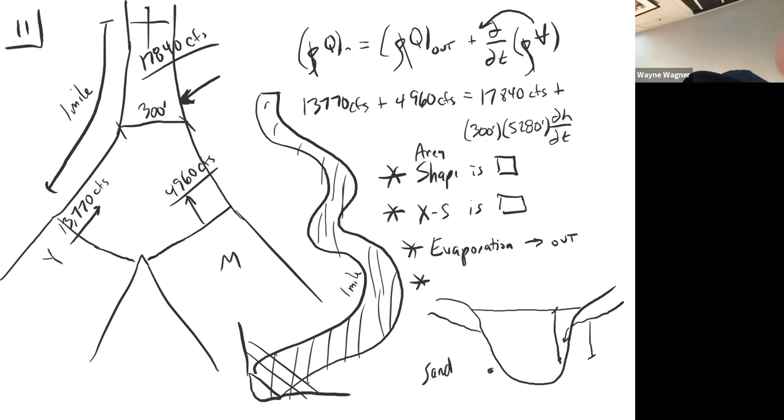On the other hand, if the river were to suddenly, like we were to get a big flood, and the river water is higher than what's in the ground, well now the pressure here is higher because the water is now deeper here than it is right here. So we get a pressure gradient and it's going to drive the water this way.

Or in this case, it's actually just going to flow straight up through the ground. So it just kind of depends. But the groundwater can go in or out - it just depends on a lot of things.

Obviously this is a vastly simplified drawing, but it's something that, because I've spent so many years thinking about these things, I realize my students never think about them. So anyway, we're about 5 minutes over, but any questions?

So how do we know that the water level was rising in this case? Oh right, so actually we know in this case that it's rising. How? Well, there's two things we can do.

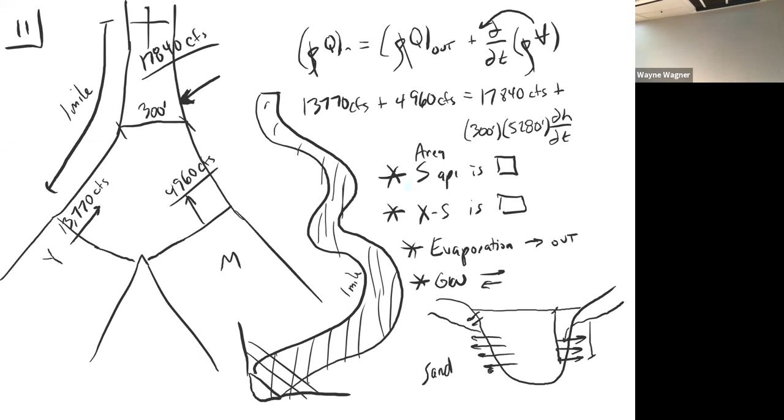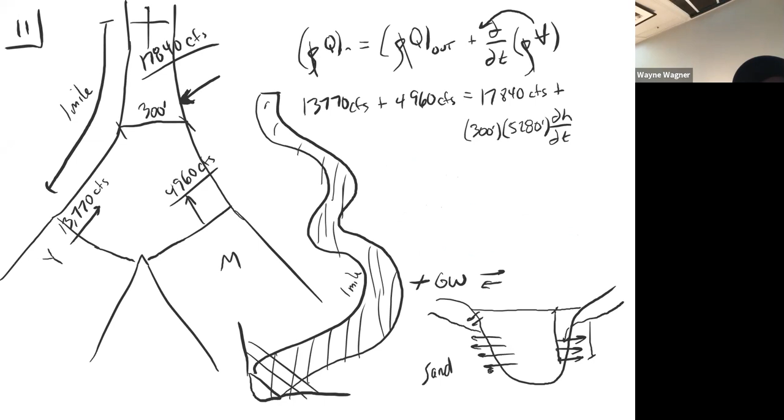One, we can solve this equation that we just created, and we're just going to look at the sign, whether we're getting positive or negative. The other way, this is basically comparing what's coming in to what's going out. And if I add those two things going in, I get 18,730 CFS - so every second, 18,000 are flowing in and 17,000 are flowing out.

So it has to store water, the accumulation has to accumulate water. Right, it has to be positive. And so if we solve this equation, we've got that 18,000 right here, the 17,000 here, so this is going to be a positive sign to balance the equation, and we're going to have a positive number.

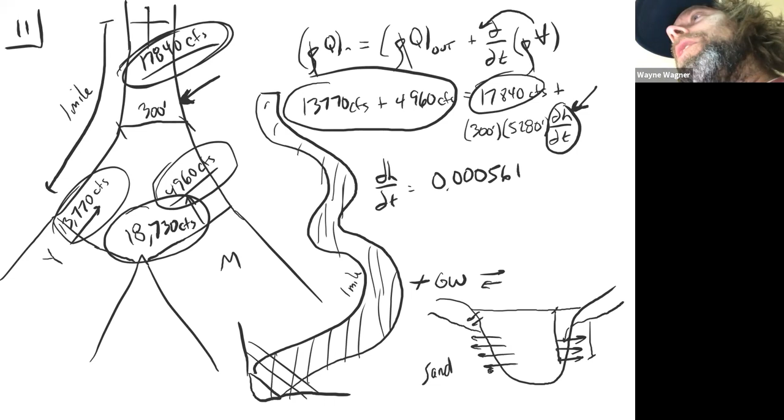Okay, let's go ahead and get the answer for you. Oh wait, I don't think this is in my key. Well, that would be annoying if it's not. Oh yeah, it is. Okay, so when you solve for it, dH/dt equals... you would expect a small number, but again, I made these numbers up. So there's really no question. 0.00056187. This is feet per second.

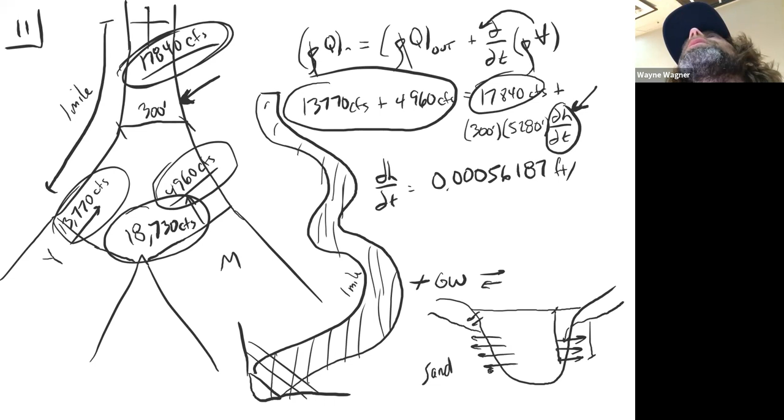So you might see that and say, is that fast or slow? What do you think? Slow, seems slow, per second. But it's feet per second, right? Like if it was 1 foot per second, that would be terrifyingly fast, right?

So I converted this because I was like, those are just the wrong units for this. So we converted it to 2.02 feet per hour. Fast or slow? That seems pretty fast, right? And again, I just made these numbers up. So, could be.

But a river could rise that fast, certainly. Flash floods, the ones that capture people, they'll rise at least this fast, faster than this. In fact, I almost got swept away by one.

You'd think, I spent my whole life studying water and water physics, you'd think I would be too smart for it, but I went and stood on a rock right in the middle of the flash flood area, and the water probably rose a foot in 15 minutes. So I guess that's twice as fast as this, and it almost got me. So that's interesting. Huh.

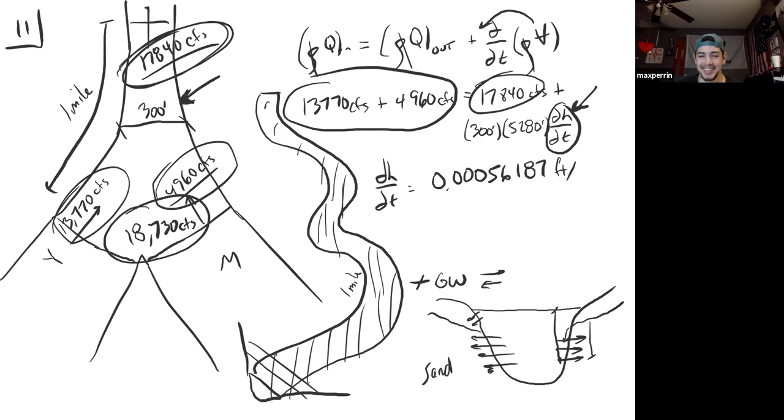Why is your screen frozen here? What's going on? Anyway, that number equals 2.02 feet per hour. I wrote it on my screen, it's not showing up in yours. Oh, it's probably from when I accidentally hit the button. Anyway, that's the end of it.

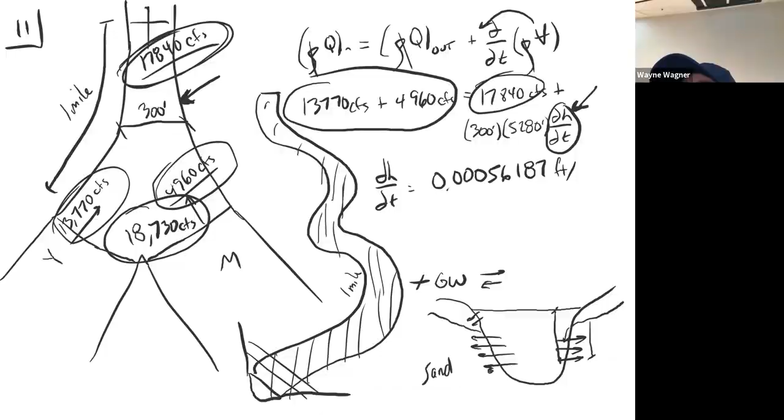I wish I could tell you a funny joke right now, for those who make it to the end. What's my new funny joke? Oh yeah, how come you don't see fat ninjas? Fat ninjas are the best ninjas. All right, hope you're having a good one, take care of yourselves.